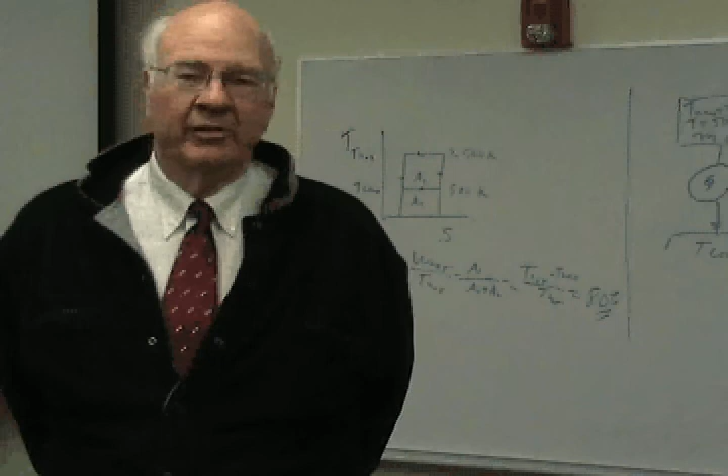I'm Professor Frank Wicks at Union College, teaching mechanical engineering. I'm going to present why the ideal fuel burning engine is not the Carnot cycle, which is too often presumed, but the cycle I'll now present, which is the ideal fuel burning engine cycle, or the Wicks cycle.

That's what the Carnot cycle is. It's usually presented as a rectangle on a temperature versus entropy diagram, but more generally, the efficiency of any cycle is the net work produced over the heat you add. On this diagram, the net work is area 1 of the cycle. The heat is A1 plus A2, and since these are all rectangles, we can show that the net efficiency is T hot minus T cold over T hot. T hot is 2500 degrees absolute, and T cold is 500. The net efficiency is 80%.

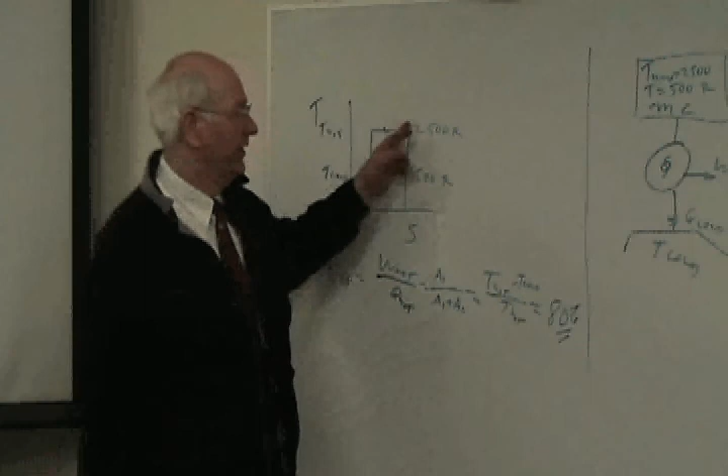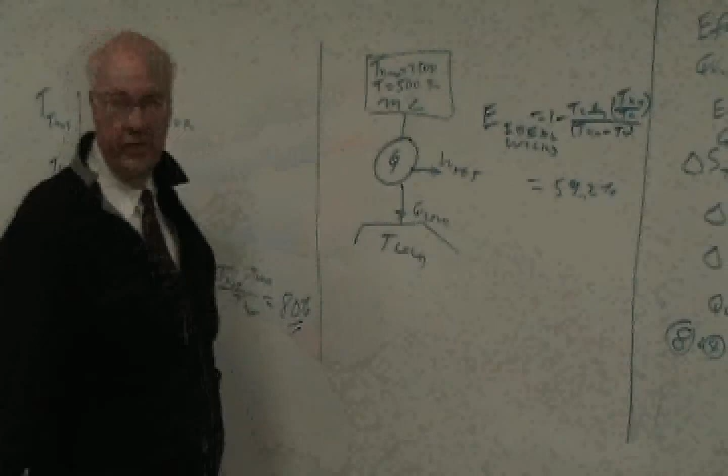That's the right answer if we had a constant source of high temperature heat. However, all our fuel burning engines produce combustion products at a max adiabatic flame temperature, and they release heat over the entire temperature range from the maximum temperature down to ambient. So I'm going to modify the derivation of the Carnot cycle and present the efficiency of this cycle.

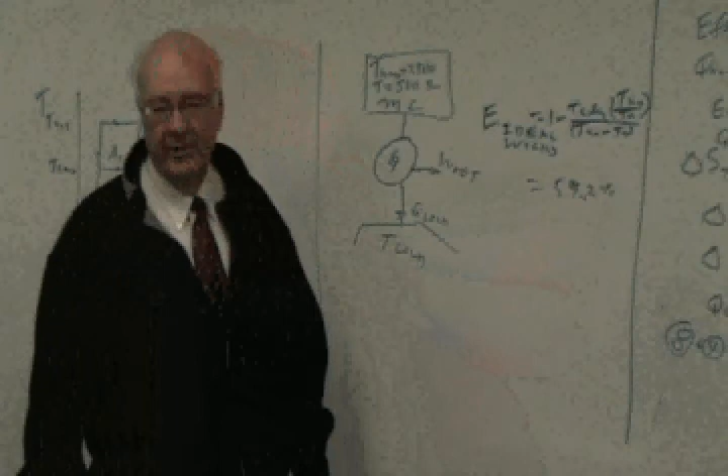I'll tell you the answer in advance. It's going to be 1 minus T cold log of T hot max over T cold, divided by T hot max minus T cold. Putting in our 2,500 and 500 degrees, we find the best efficiency we can get is 59.2%, as opposed to the wrongfully calculated 80% using the Carnot cycle efficiency for a fuel burning engine.

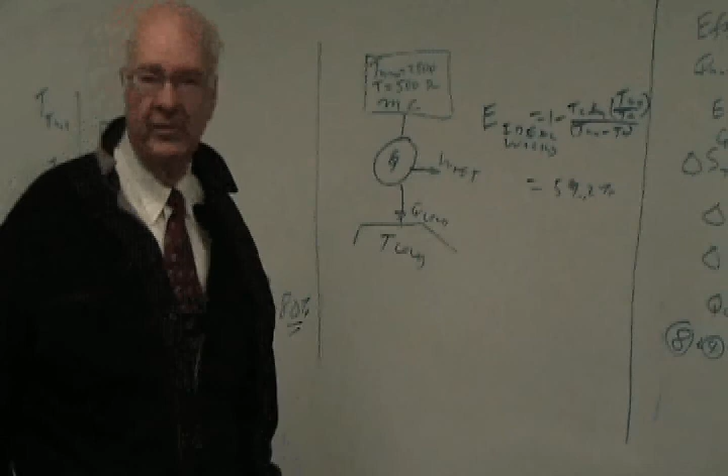Now we're going to show how this is derived. The efficiency of any engine is work net over Q hot. The heat in either comes out as net work or heat to the cold side. Therefore, the efficiency is 1 minus Q cold over Q hot for any engine.

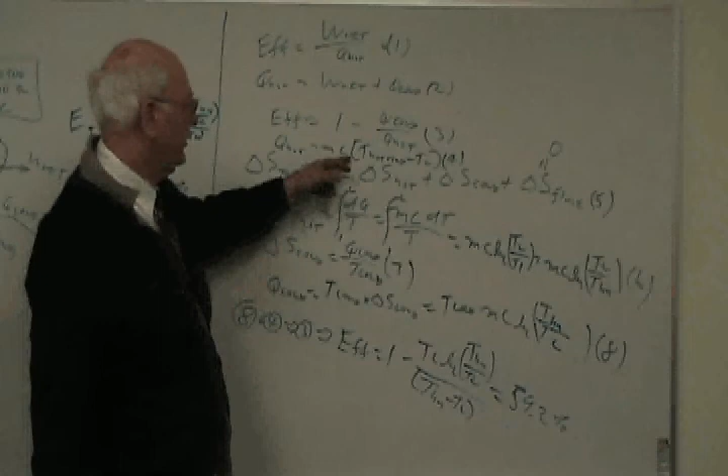But for the fuel burning engine, Q hot is the mass heat times heat capacity of the combustion products times their temperature change from max down to the ambient temperature.

For any ideal engine, the second law says delta S total entropy is 0, which is delta S of the hot side, the source of heat, plus delta S of the cold reservoir receiving the heat, plus delta S of the working fluid, and this last part is 0 since entropy is a property. So full cycle means the net change is 0.

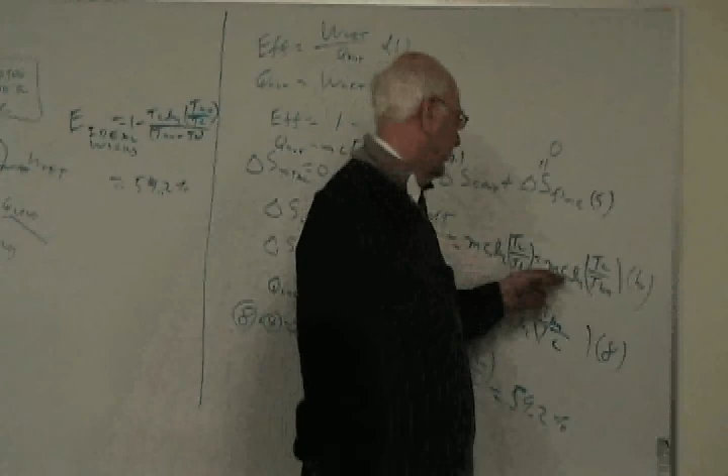So now going back to the hot reservoir, we had to do some calculus. The change of entropy of the hot side is the increment of heat over the temperature as it cools off, which is the mass heat capacity over temperature, and this integrates finally into the mass heat capacity times the log of the cold temperature over the hot temperature. Note that's a negative number, so the hot reservoir gives up heat, and therefore it loses entropy.

The cold reservoir, the environment, receives all the heat at the same temperature, so what it gets is Q cold over T cold, or equation 7.

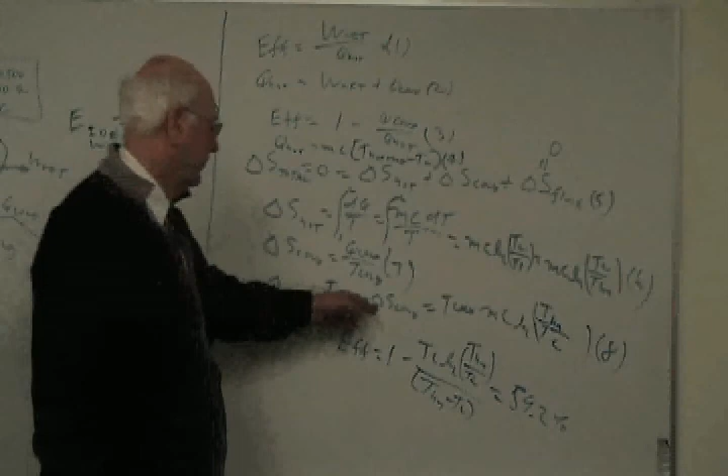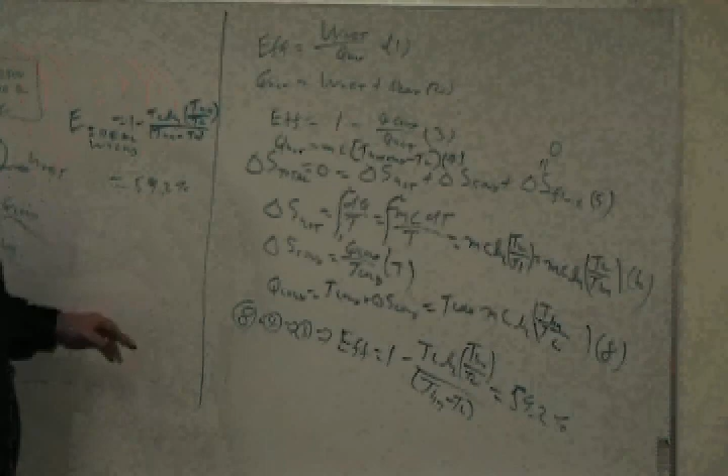We can get the heat to the cold side, since this is all constants, as the temperature of the cold side times that change in entropy, which we have here. Now putting equations 8 and 4 back into 3, the efficiency of the ideal fuel burning engine is what we presented up here, or 59.2%.

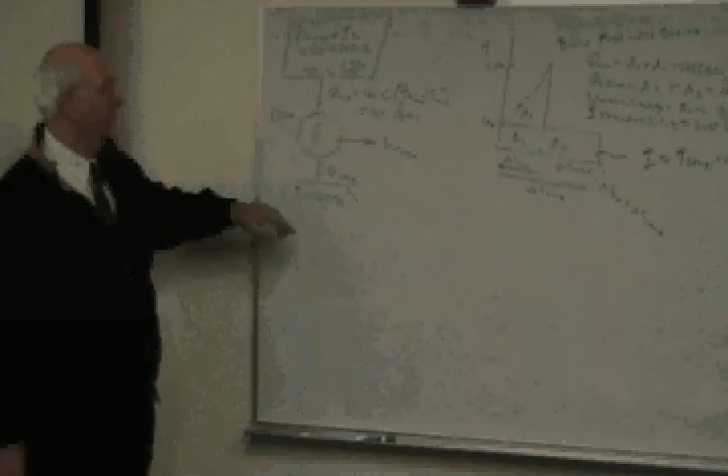You get the source of heat, combustion products that cool from the maximum temperature down to 500, with a certain mass and heat capacity, so assume there's 100 BTUs here. We have an engine cycle in here that may be any ideal or non-ideal engine, and then the heat is rejected into a nominally constant temperature environment, we'll call it 500.

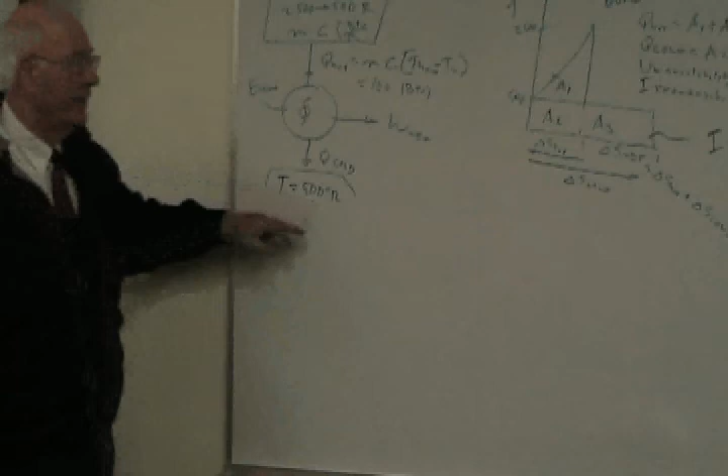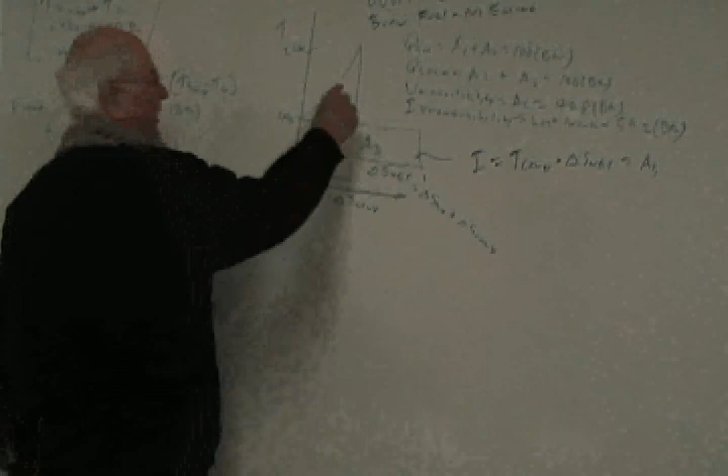We can put the same information on this diagram with an engine of zero efficiency, or no engine. The heat that comes from the combustion products cooling off is area 1 plus area 2. What goes to the environment is area 2 plus area 3. Each one is 100 BTU.

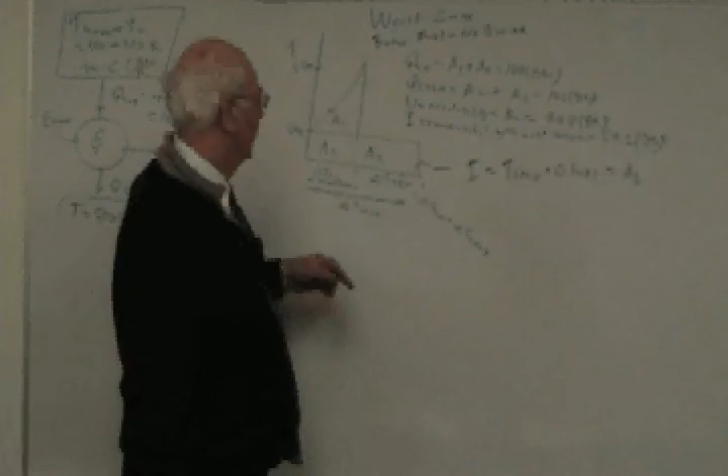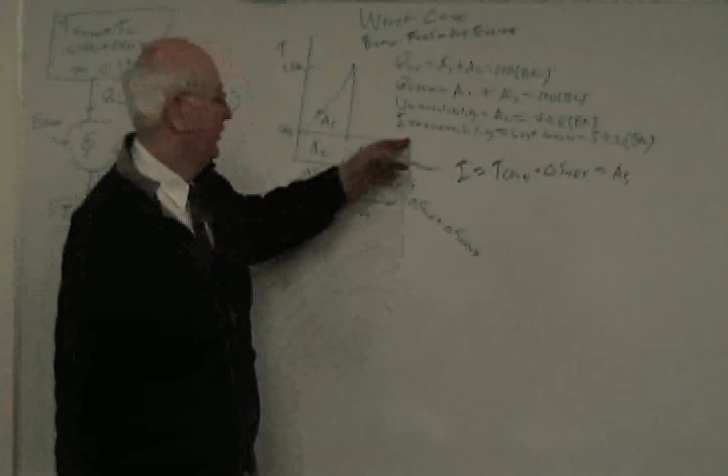But going to the next step, what goes to the environment is the unavailability of 40.8 BTU, which is what we'd lose with the ideal engine according to Wicks. And the irreversibility, what we could have had but didn't get, is the 59.2 BTU.

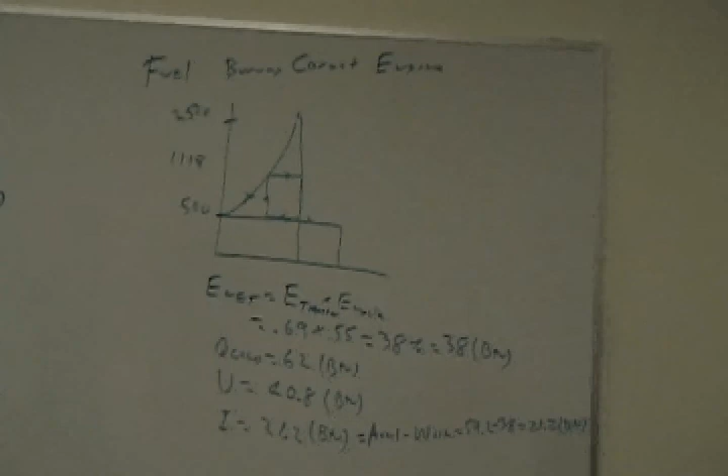Okay, supposing someone was to build a fuel burning Carnot cycle, which 100 years worth of thermodynamics has wrongfully suggested, what you'd have to do is first figure the best temperature on the high temperature side. You could use 2,500 to get maximum efficiency, but then there's no heat into it.

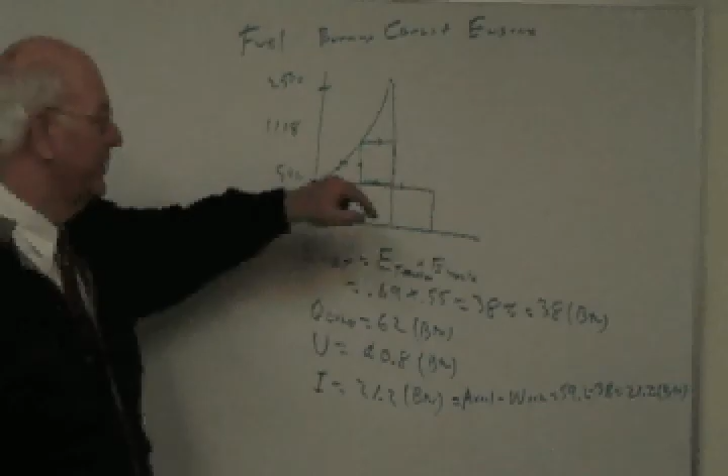You could use 500 degrees for the hot side. You'd get all the heat into it but no efficiency. The best compromise is the geometric mean between the max fuel temperature and cold, which is 1118 in this case.

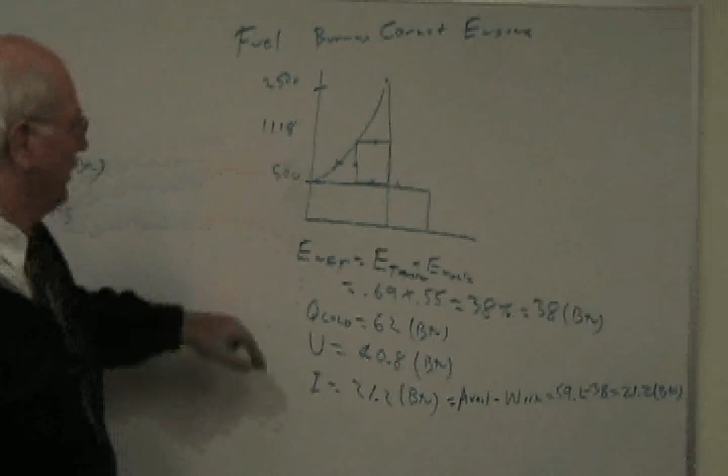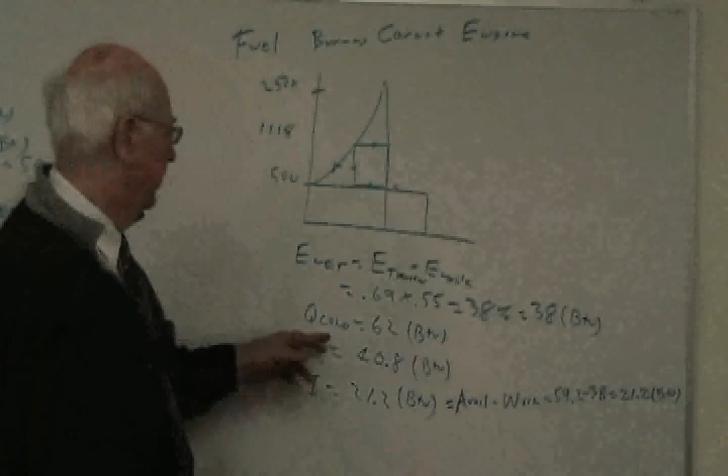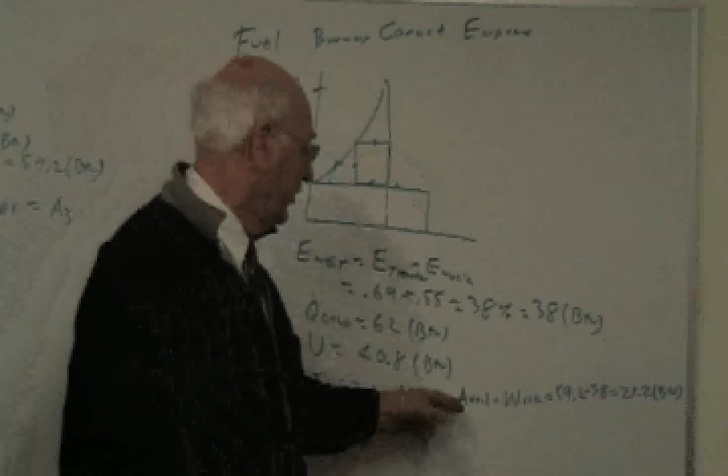The net efficiency is going to be the 69% of the heat you get into the cycle times the 55% efficiency of a Carnot cycle once you get it in, or 38 BTU. Going further, the total heat to the environment is going to be 62. The unavailability is still the 40.8. The irreversibility is going to be the 21.2, this area over here, which was your availability minus the work they actually got, which again is 21.2 BTU.

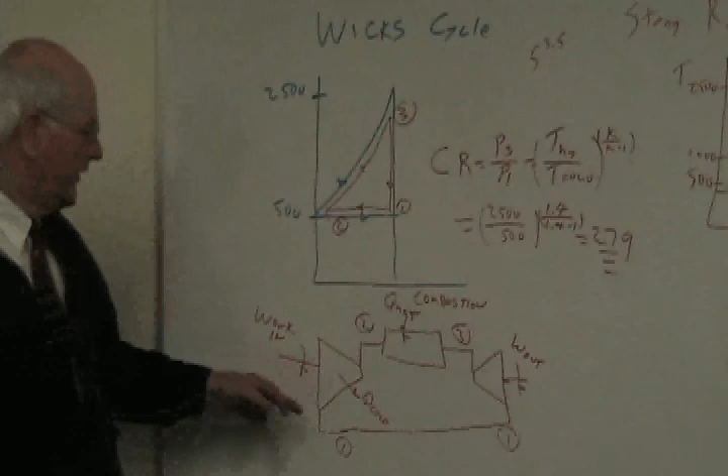Or the way we might implement it, what we want is a cycle that's a perfect fit for the availability. So we want something that goes from 1 to 2 to 3. The way to implement it would be with a compressor, but it has to be an isothermal compressor, so we simultaneously put the work in and keep it at the ambient temperature, so we go from 1 to 2. Then we add heat through the combustion chamber to go from 2 to 3.

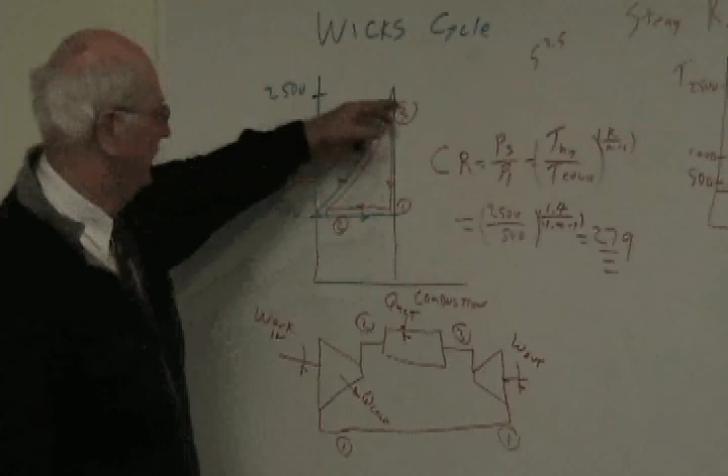Then we go through an ideal turbine that gets us from 3 back to 1. Coming out of the turbine here, we're back to ambient, back to our starting pressure and temperature, so nothing's left over. This point 1 is the same as that point 1.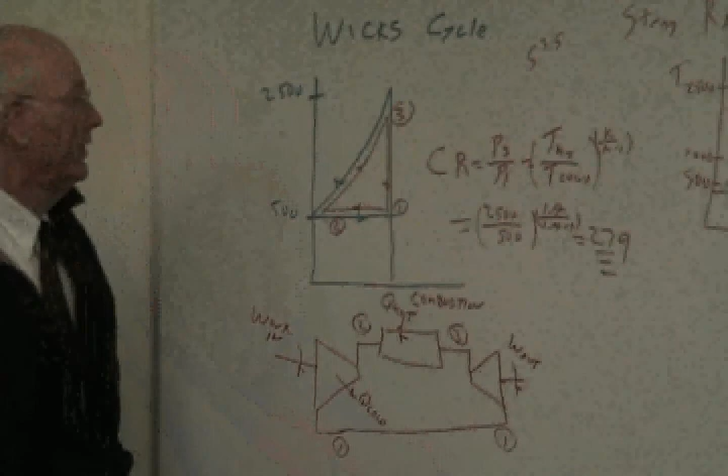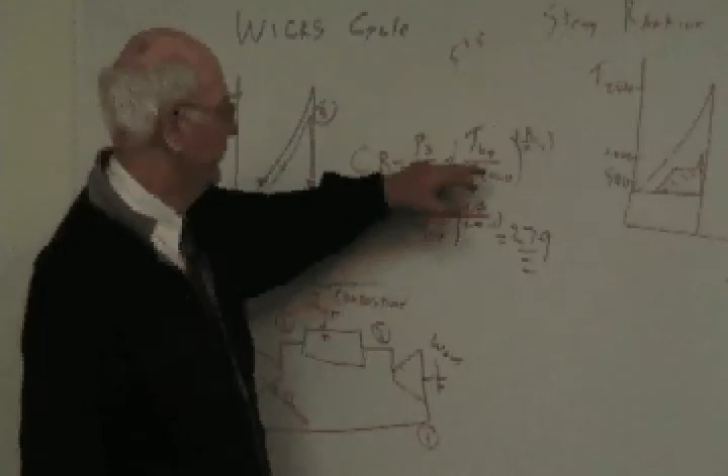This is ideal, but the problem is we find the pressure ratio is defined as P3 over P1 for the ideal gas. It turns out to be 279, so 1 atmosphere going in, we'd have 279 atmospheres required coming out of the compressor, which is non-practical.

But we have defined what's ideal. This could also be a bottom cycle on a gas turbine, which would have obviously maybe an acceptable temperature coming off a liquid geothermal source. But we define the ideal fuel burning engine and show what it looks like.

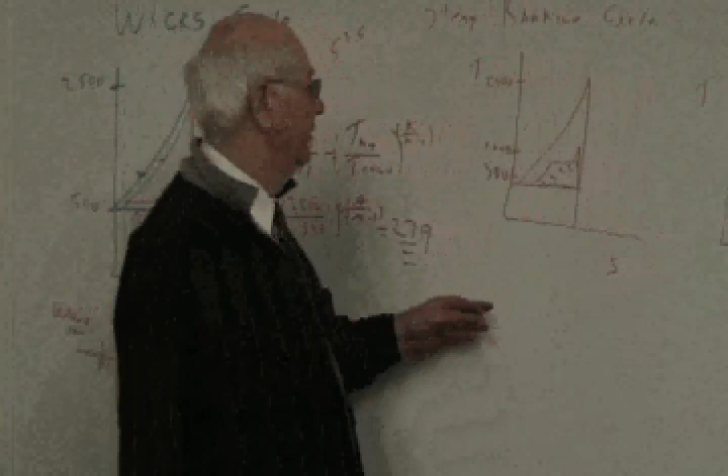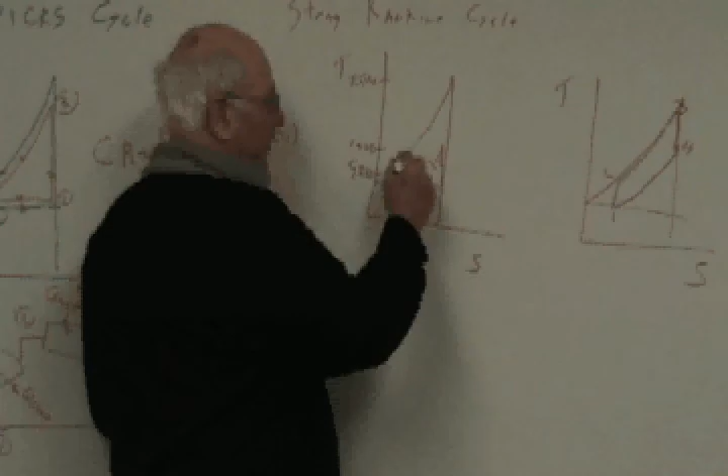Now we look at our existing cycles. We have our steam Rankine cycle, which we put down here, and we find out this is the advantage over a novel cycle. We can utilize the low temperature heat for water heating, and we got the boiling and then the superheating. It's good on the low temperature end, but it cannot utilize high temperature—it degrades high temperature down to the boiling temperature steam mostly.

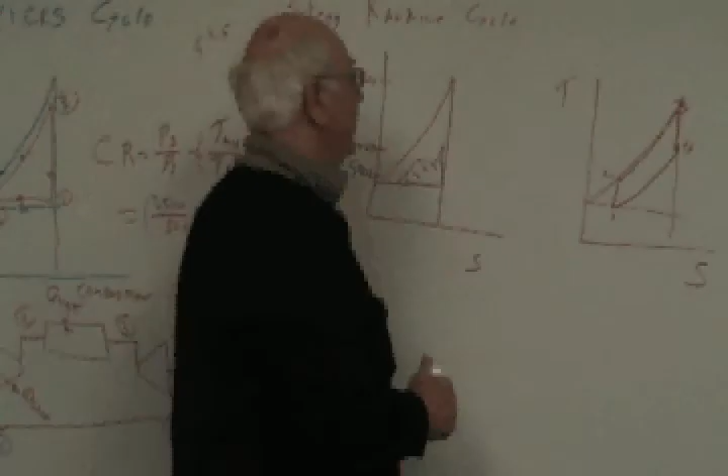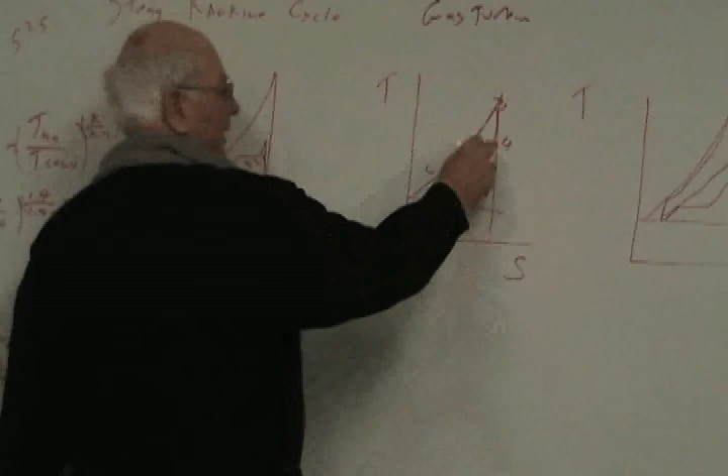Separately, we can have our gas turbine cycle. In a gas turbine compressor, our combustion products are what goes to the turbine. Here's the exhaust from the turbine. We do a good job on the high temperature end. The downside is we reject at a high temperature.

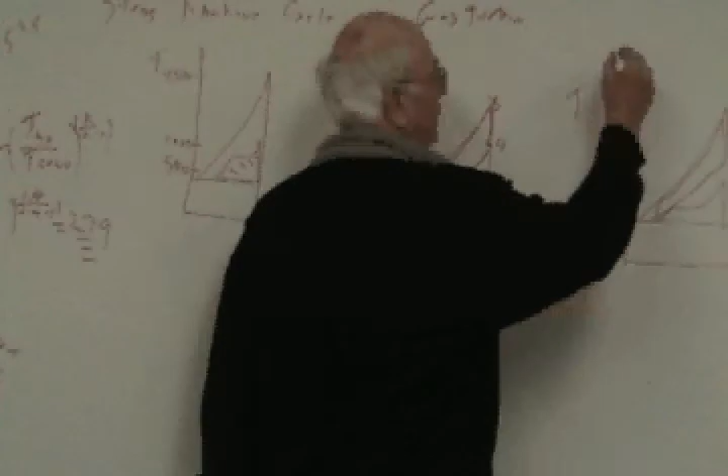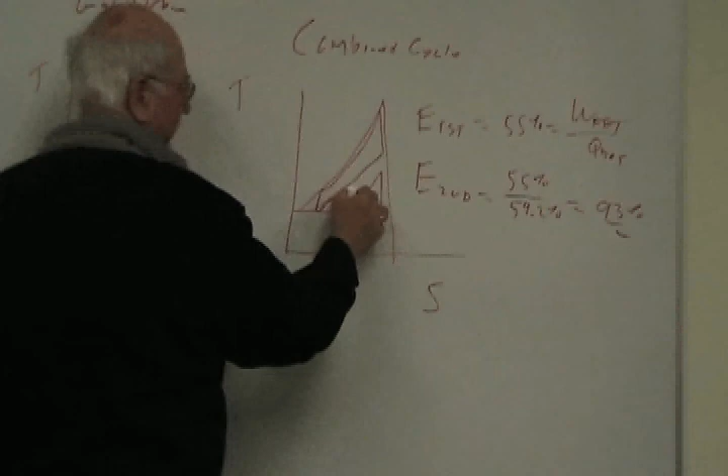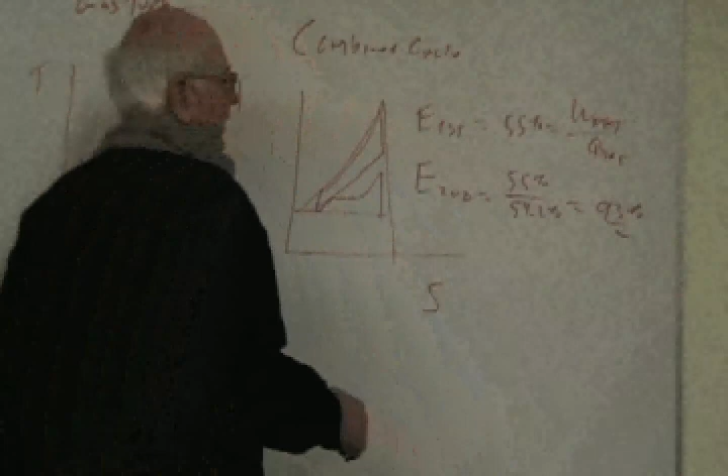So either one of these separately can be 35 or 40% efficient, but a combined cycle, by putting the two together, we do a better job of getting cycles to meet our availability or exergy. Put the gas turbine on top, recover heat into the steam turbine cycle, and you can get from 50 to 55% overall efficiency, which is called the first law of efficiency—our net work divided by the heat we put in. But the second law of efficiency is how well we did compared to the best we could do.

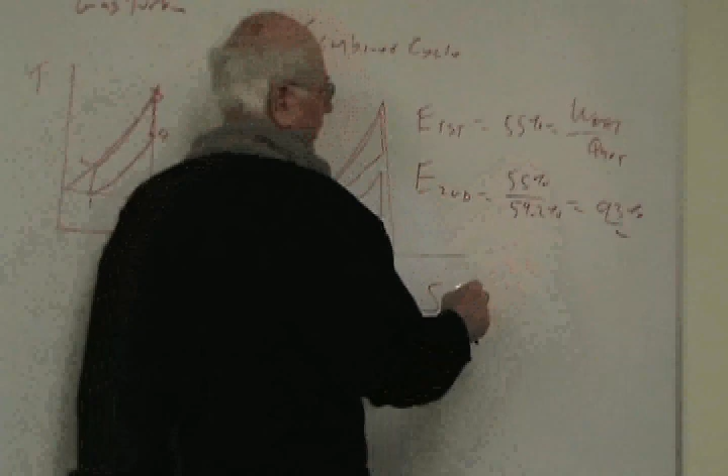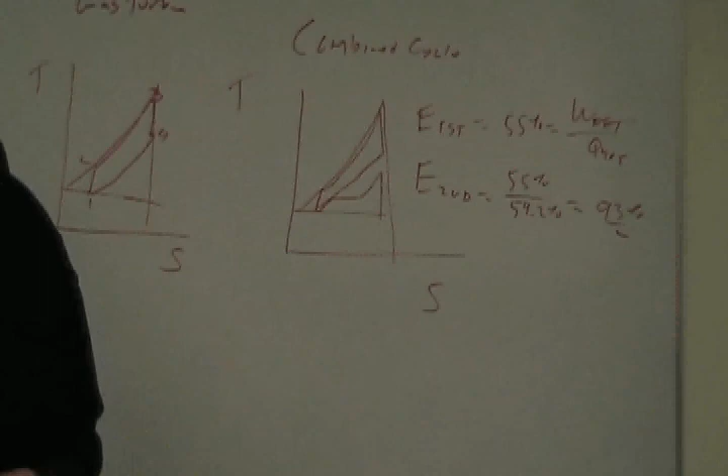Using these numbers, with the most advanced combined cycle, they claim about 55% overall efficiency. Ideally, we can only get about 59.2%. So you have a second law efficiency of 93%, which basically shows you're doing about as well as you possibly can ever do on a fuel burning engine with existing combined cycles.

This was presented in 1991 at an Intersociety Energy Conversion Engineering Conference over in Boston, under the title of the Thermodynamic Theory and Design of an Ideal Fuel Burning Engine. So much of this material was presented then.

I've used this, and other people have used it, for a number of second law analyses of engines since then. Here's a newly published thermodynamics book by Professor Chih Wu of the United States Naval Academy, Thermodynamics and Heat-Powered Cycles. In here he has examples of the Wicks cycle for the non-flow piston cylinder version and the flow version of the turbine compressor. I would hope and expect that all credible thermodynamics books in the future should define the ideal fuel burning engine, or the Wicks cycle, and give related examples like Professor Wu has done in this book.